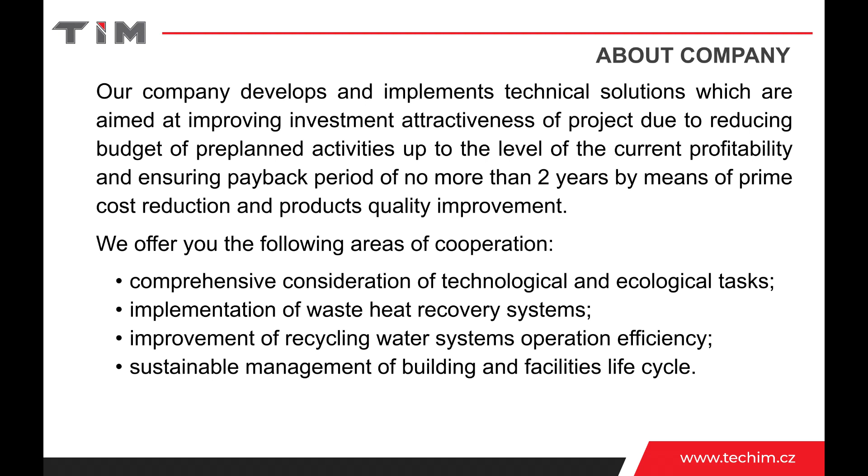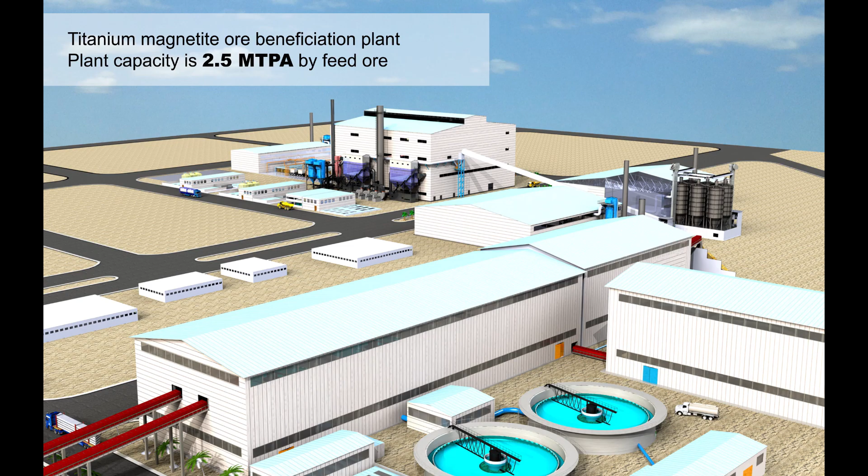High-quality engineering and extensive use of intelligent 3D modeling enables the customer to maximally avoid unforeseen additional expenditures and not to exceed time limits during construction. Our solutions are successfully implemented at such industrial enterprises as Metinvest, Severstal, ArcelorMittal, and Solvay.

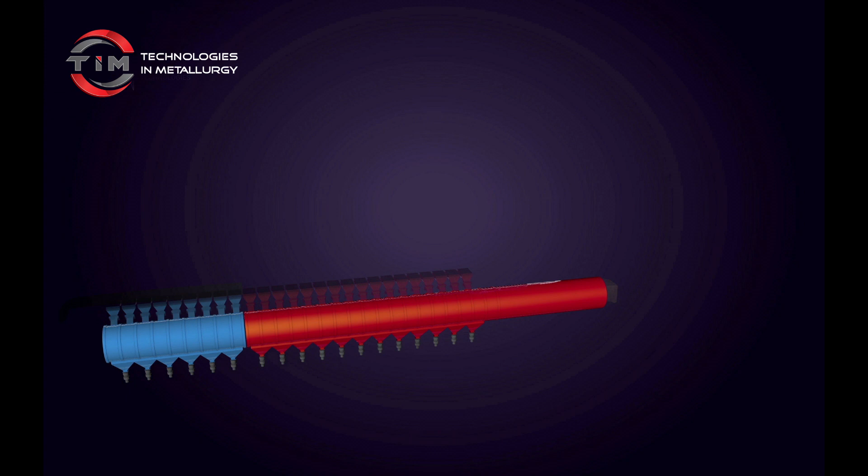One of the examples of improving efficiency of technology with a payback period of 1-2 years is the comprehensive solution for sinter production. It is aimed to increase efficiency, improve quality of sinter, and observe environmental norms. We have studied the existing operation scheme of the sinter machine that is based on irreversible losses of heat caused by solid fuel combustion in sinter cake, while heat losses amount to about 40%.

This technology is characterized by low capacity and poor quality of output products with approximately 12 to 15% fines content. There are also two powerful sources of emissions in the form of stack flues that have a negative influence on environmental performance of the enterprise.

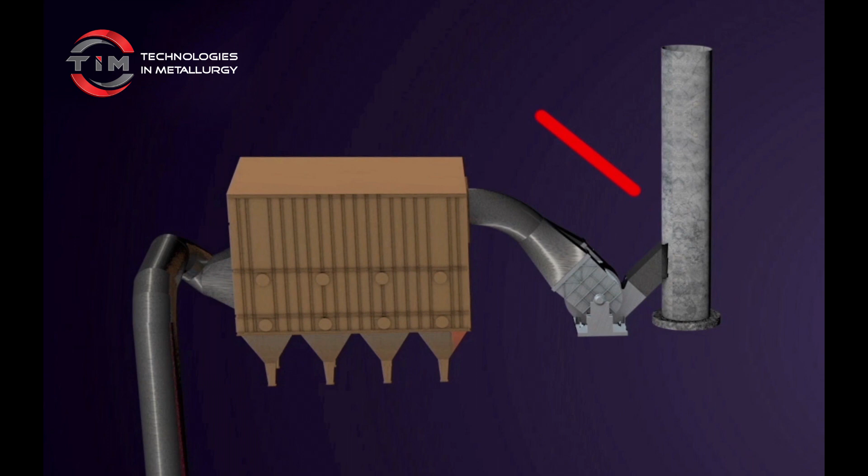As a result, specialists of Technologies in Metallurgy, in cooperation with partners and departments of the customer, developed a solution that enabled changing the direction of airflow of the cooling zone for easy transfer and recycling of heat received from hot sinter cooling after sintering. This enabled improving qualitative characteristics and at the same time decreasing operational expenditures, while the stack flue and gas cleaning system of the cooling zone were excluded from the technological cycle.

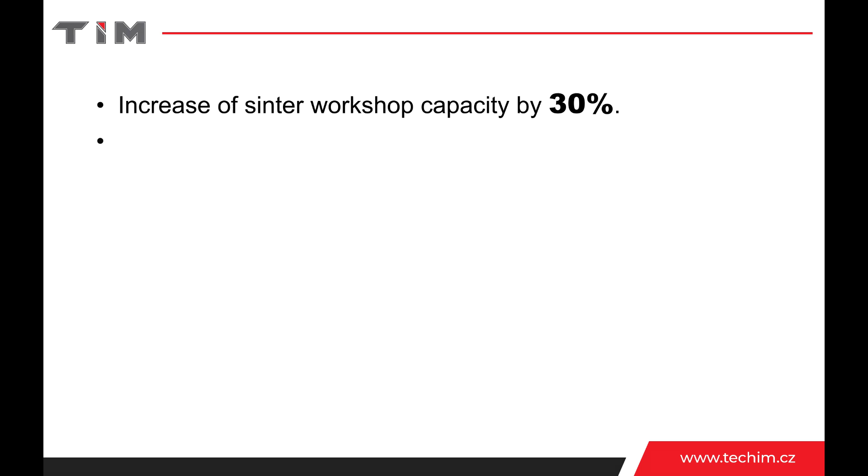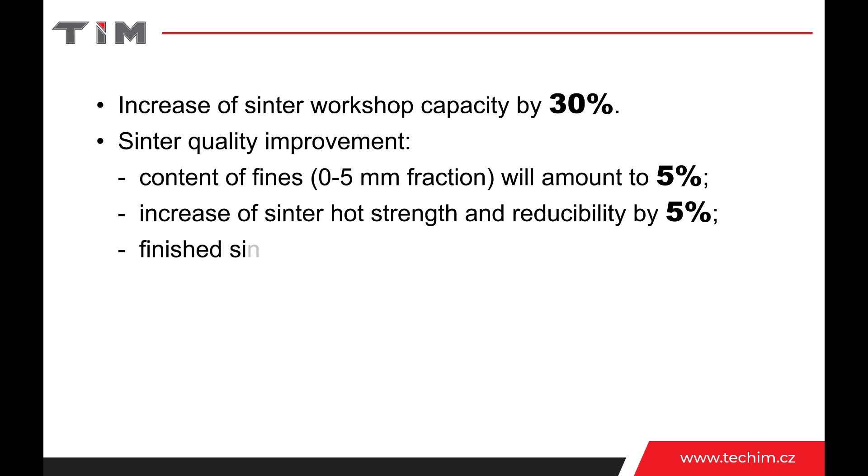This solution enabled increasing sinter workshop capacity by 30% and improving sinter quality, while content of fines with fraction from 0 to 5 mm did not exceed 5%. Hot strength and reducibility of sinter increased by 5%. Temperature of finished sinter was within 120 degrees Celsius, consumption of solid fuel into the burden of sinter machines decreased by 15%, and all environmental requirements were met.

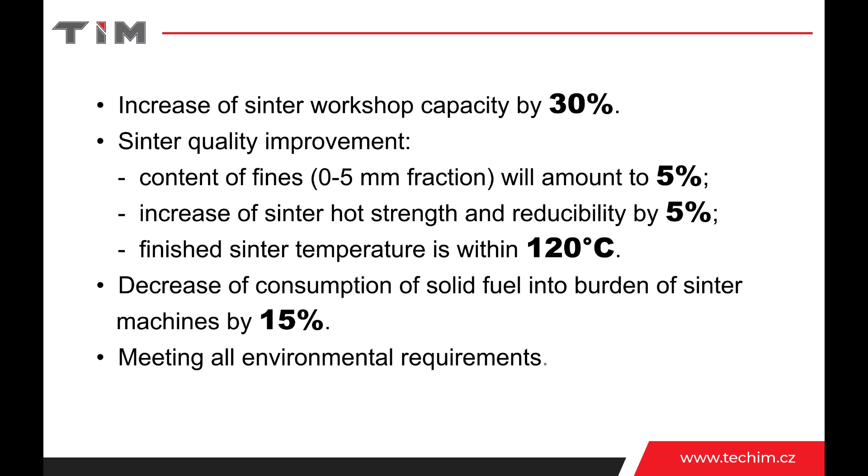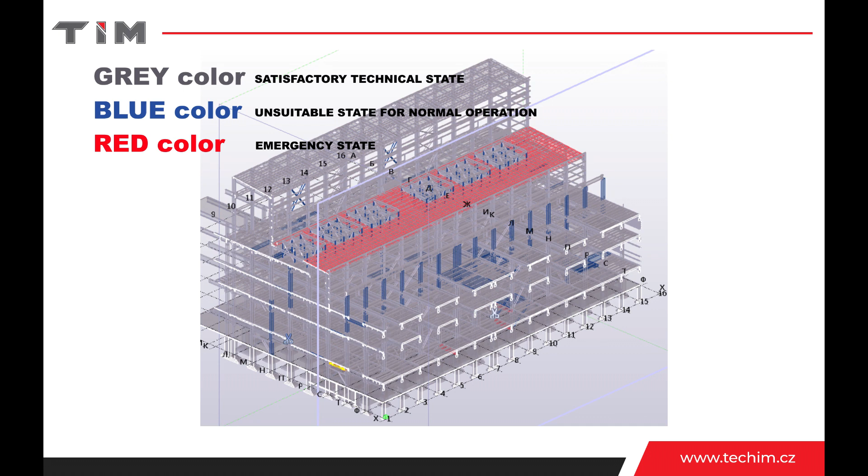In order to calculate expenditures for construction and installation work on modernization of sintering production, simultaneously with the development of comprehensive technology solutions, specialists of Technologies in Metallurgy company surveyed the building of the sintering facility with its subsequent 3D modeling. This enabled estimating its current state and specifying the required scope of work on strengthening the building, taking into account implemented technological solutions, while probability of errors during project implementation was eliminated.

Applying a comprehensive approach for solving some high-priority tasks allowed meeting customers' requirements to decrease the budget for implementation of this solution from $250 million planned for new construction to $54 million for reconstruction. Such an approach also enabled improving efficiency of the existing technology and ensuring high investment attractiveness of the project with minimum payback period.

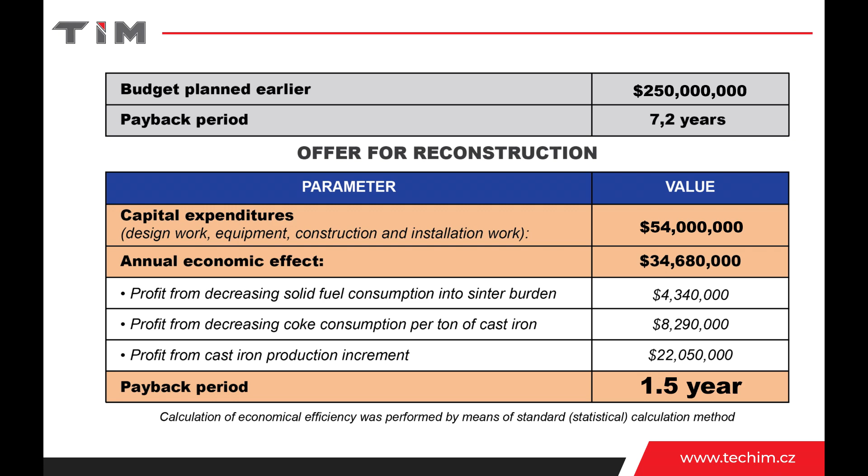One more example of improving the production efficiency of a metallurgical enterprise by means of a comprehensive approach is the solution for water supply and removal system reconstruction, ensuring a payback period of 1-2 years. Tasks that can be solved by means of reconstruction are as follows: reduction of expenditures for water supply and removal systems maintenance, reprocessing of slurry contained in wastewaters, reduction of consumption of fresh processed water and disposal of production wastes, stoppage of industrial waste disposal into the slurry collector, and improvement of conditions of water supply and water removal systems operation.

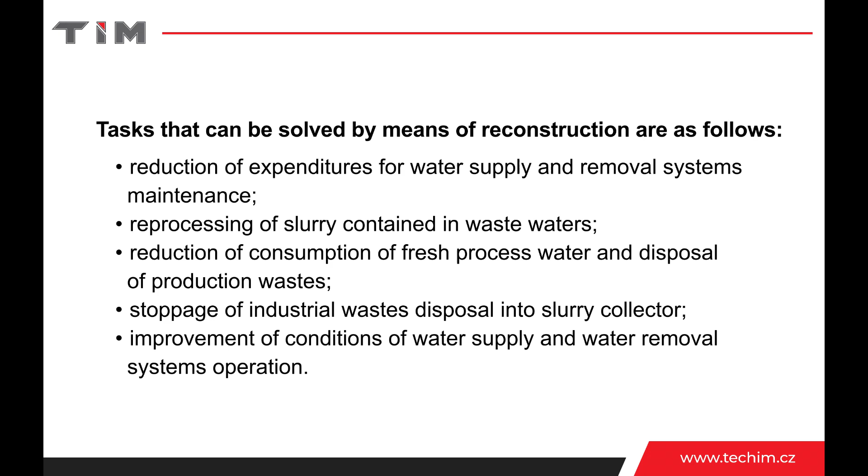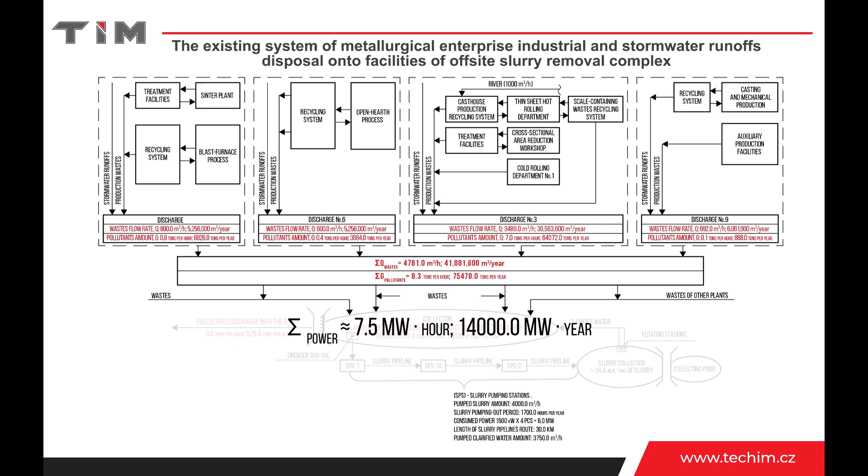The existing water removal system makes provision for discharge of stormwater runoffs and production wastes into the slurry collector. After concentration, homogenization and sedimentation of pollutants, clarified wastes are discharged into the river and sediment is pumped into the slurry collector for thickening. The existing water removal system requires large operation costs. Specifically, power supply of the complex requires 14,000 megawatts of power per year. That brings about payment for power in the amount of $1 million per year.

In order to reduce operating expenditures for the existing facilities and utilities, the feasibility of water supply and removal systems reconstruction was proved. The reconstruction includes the following: providing recycling systems for equipment cooling, arrangement of local purification systems, arrangement of after-treatment of part of the waste with its subsequent use for makeup of the recycling system and stoppage of fresh processed water consumption, return of overflow and blowdown waters into the recycling system, reprocessing of additional sediment on the existing facilities and plants and its usage in production, and reduction of expenditures for power supply.

Advantages of the suggested reconstruction scheme are as follows. Stoppage of discharge of production wastes and pollutants into the slurry collector. Periodical discharge only of stormwater runoffs from the industrial site only during the warm period. Reduction of fresh processed water consumption for makeup of recycling systems for equipment cooling. Solving of problems concerning operation of facilities and utilities, as well as reprocessing of resulting slurries.

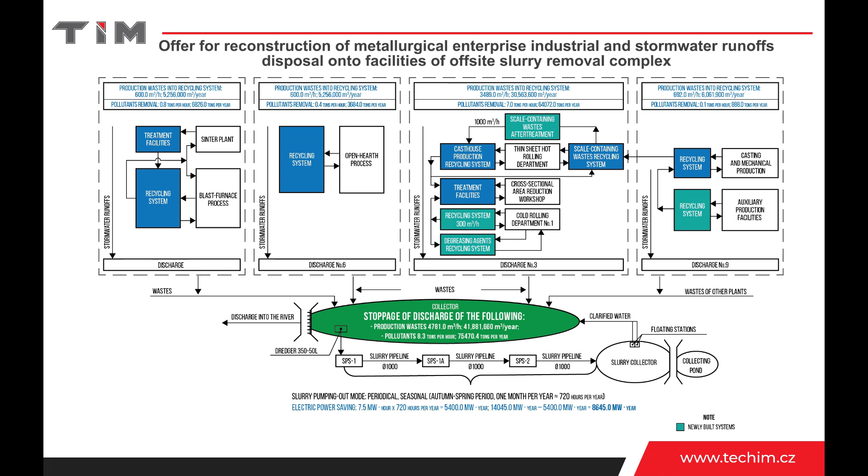Total economic benefit that can be obtained from water supply and removal systems reconstruction owing to saving of power, fresh processed water consumption, as well as the reprocessing of iron-containing slurry will amount to $1,746,000 per year, which proves the feasibility of reconstruction with a payback period of 1-2 years.

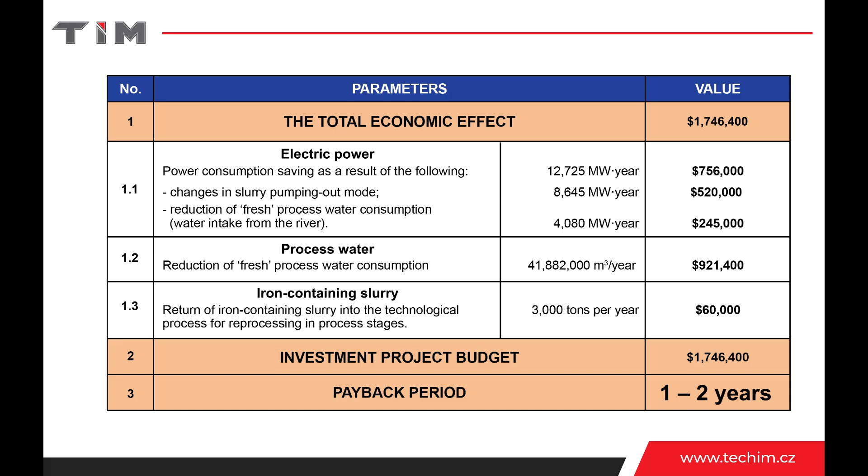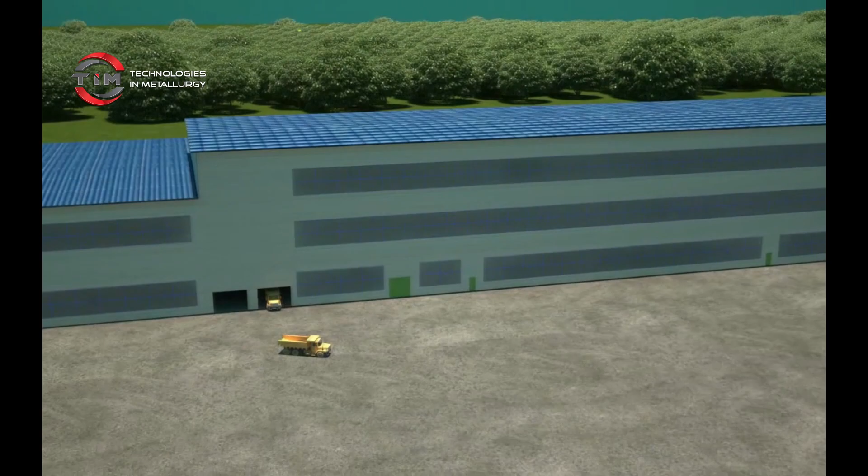Also, an example of effective engineering solution is the development of a unified water treatment complex for a casting and rolling module consisting of 2 converters, 2 continuous casting machines and 3 rolling mills. The water treatment complex consists of the following: 8 recycling systems ensuring supply of water with corresponding parameters and certain quality for equipment cooling, a system of return recycling water and polluted waste treatment to the required quality of water in the recycling systems with maximum use of zero discharge and non-waste technologies.

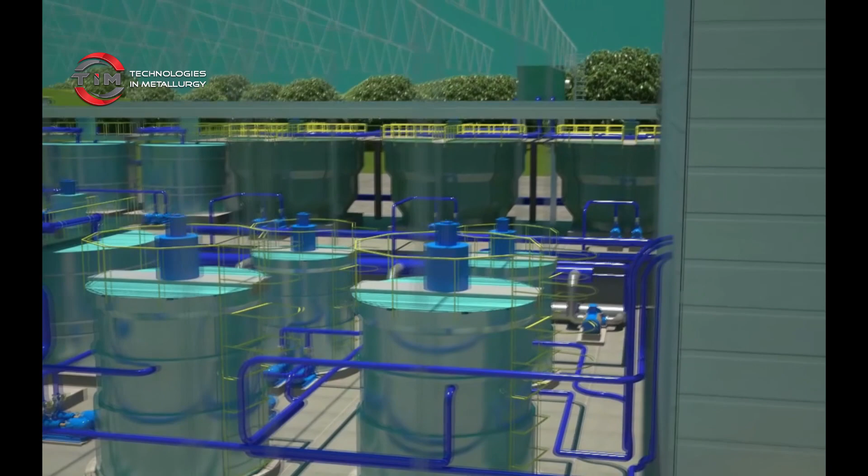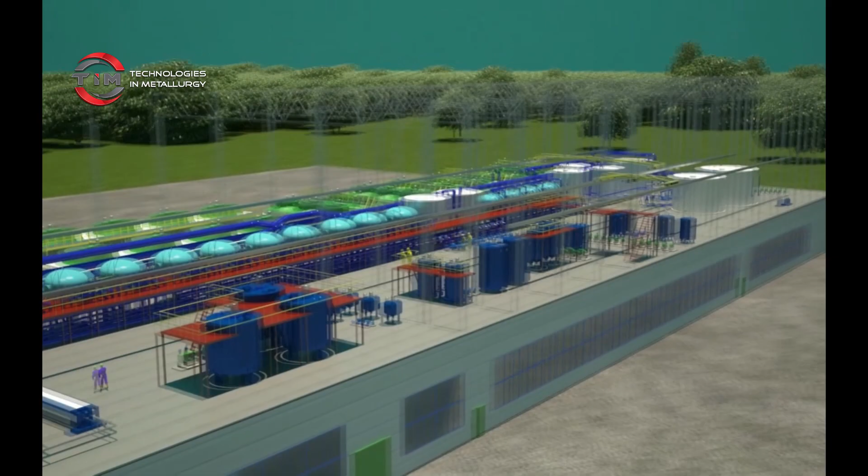The amount of generated waste concentrate is no more than 0.7% of the complex capacity. The generated slurry is dehydrated and reused as follows: iron-containing slurry in the main production process, lime slurry in the auxiliary production process. Also, the water treatment complex consists of makeup plants for 8 recycling systems of 5 types of quality: processed, clarified, softened, demineralized, desalted, and highly desalted permeate.